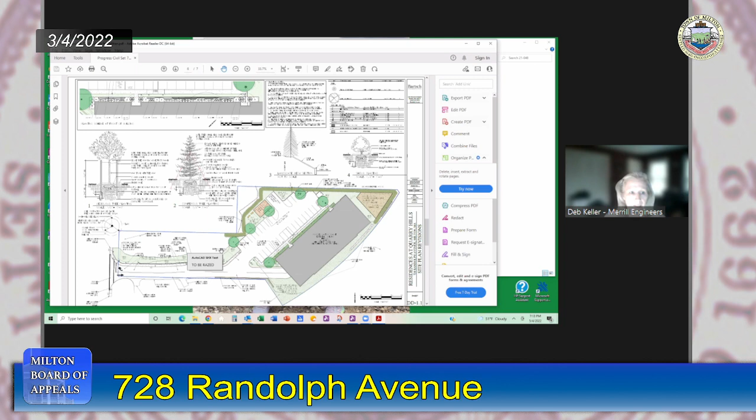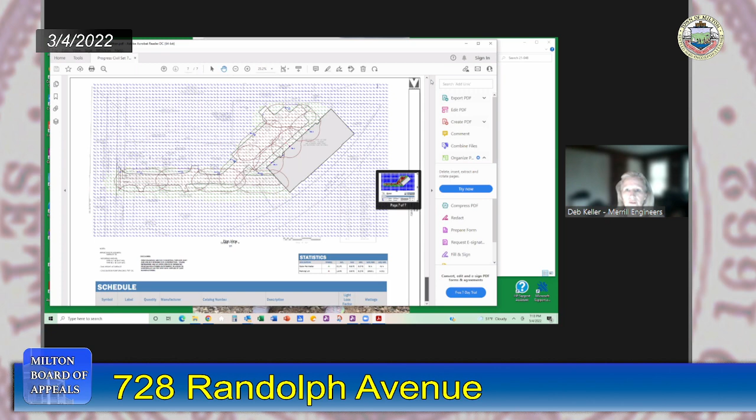As a progress set, we also did have lighting completed for the driveway itself and the parking lot and front of the building. That covers what we've done thus far from a site plan perspective.

I can either try to answer any questions at this point, or move on to the architecturals and the improvements that were done on the building. I don't have any questions yet. I don't know if Nick or Jeff have any questions.

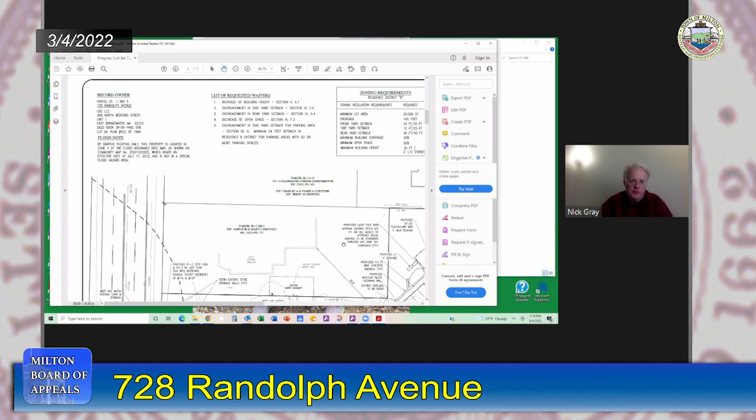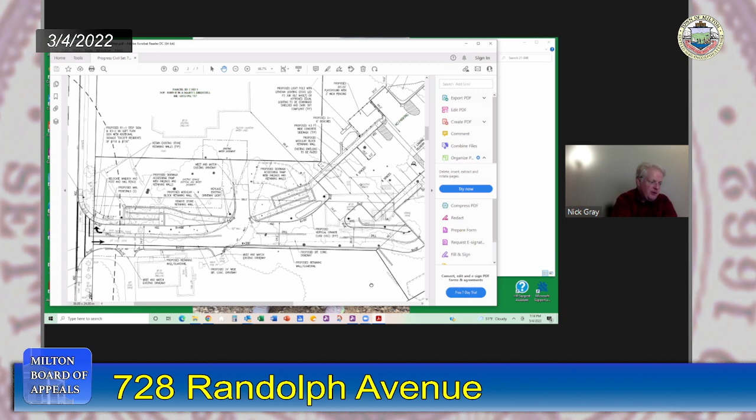No questions. If you could do me a favor, because the screen is so incredibly small to be able to see what you're pointing at. If you could refer, when you're talking to a sheet, give us the corresponding sheet number for the filing on this revised plan set, that would be really helpful so that I can look at it in a bigger, easier manner. Okay.

Mr. Chairman, if I may, just one quick thing. We'll let Andy go forward with the building plans, but I forgot to mention that we also have Jeff Bandini, and he sent in a supplemental memorandum related to the traffic concerns raised on the entrance onto Randolph Ave. That was sent to you folks and to Sean. So after Andy, with the board's permission, Jeff would like to report on that as well. Thanks. Okay.

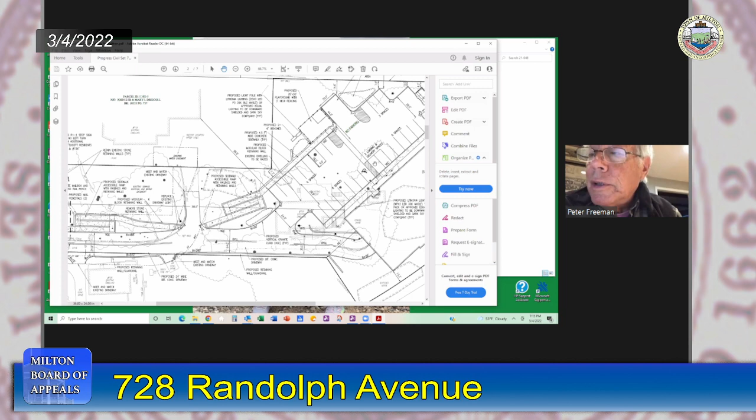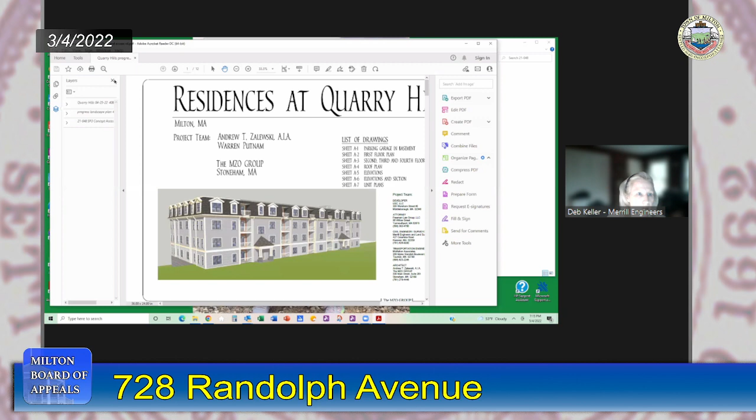Andy, do you want to go through them, Deb, or have Andy do them on the building plans themselves? I was assuming Andy was going to, but I'm not. Rob, is Andy here? He said he was going to be. I don't see him. Let me see, I do have the progress plans that I believe were sent. Again, they may be harder to see, not as big as possible.

So Deb, can you turn to sheet A-1? I can just walk through them. Sure, yeah, so she did the A-1. So Andy and I sat down and we addressed some of the comments, the architectural comments by Cliff.

So if you turn to sheet A-1, we included some amenities on the inside of the building. We included a community room on the ground floor. Andy addressed all the elevator comments, so they don't open up into the stairwell. We configured the floor plan slightly, and also included an exercise room with a gym to the right of that. And then some common storage for each of the units, so each unit would have their own individual common storage.

Did we add some internal bike racks too, Rob? Correct, we just, on the internal, deleted the bike racks on the exterior per the comments of the board. So that's pretty much it on the ground floor. Everything else pretty much stayed the same. We deleted a few parking spaces, obviously.

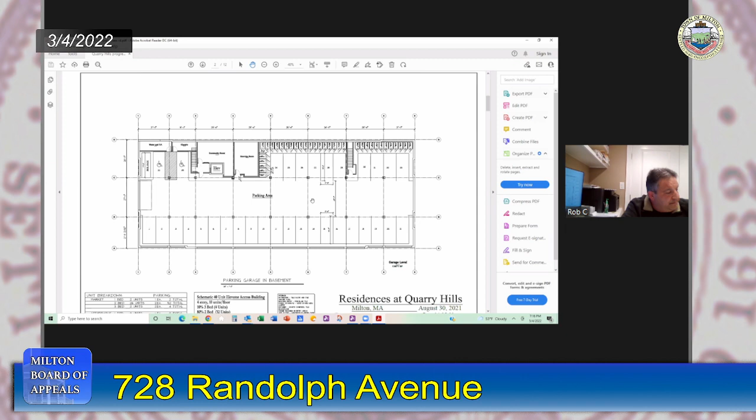Okay, you want to turn to sheet A-2, Deb? Yep. Also on the left side entrance there, we included a package room for all the packages for all the tenants.

And on each floor, if you look, Deb, towards the middle there, he hasn't labeled it yet, but we're going to have a community room where all the condominium owners will be able to gather if they want to do a Zoom or a podcast, then they could do that in that room. Each floor will have a community room as well. Is that this here, Rob? Yeah, we're going to incorporate both those - delete that wall there and have one just room because we don't need that closet.

Those are the basic changes for the interior of the building. I know Andy's working on some more detailing for the screening, the rooftop screening, and the garage screening for the open ventilation, but that's pretty much the gist of it.

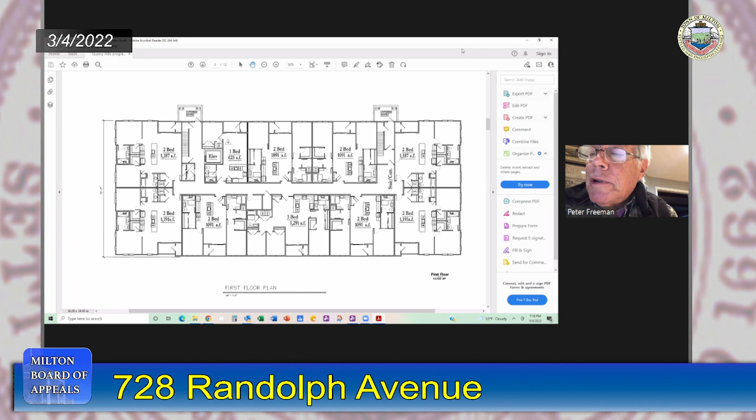Rob, can you or Deb show also on the site plan, which I didn't intend to rush over, but Deb, sheets probably need to be pulled up where some additional space has been added?

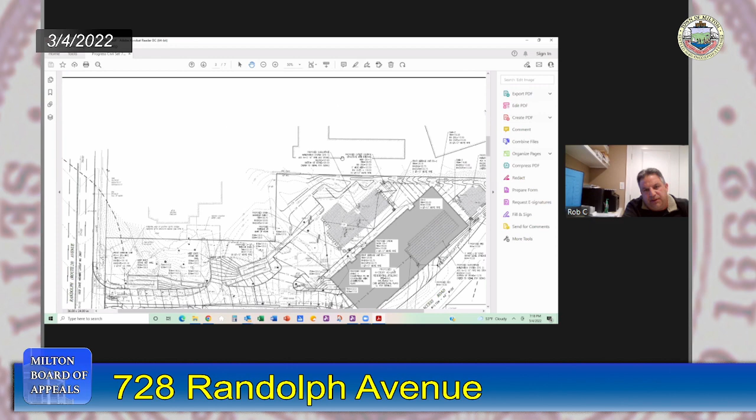You're talking about the amenity spaces? Yes. Yeah, so the best plan for that is the architecture, the landscape plan, Deb. If you want to pull that up, that'd probably illustrate it a little better. And it's colorful. Yeah.

So we engaged. That is sheet DD 1.1, that's a landscape plan. We engaged with a landscape architect.

The site plan was moving a lot. It doesn't incorporate the ADA ramps along the driveway. We're going to have some screening there to screen the ramps. But we included, obviously, the screening around the northern section that goes all the way around.

We have a fenced-in dog park area, which is a pretty big area for all the tenants to use. If you look at the top of the sheet, we have a planting schedule with all the plantings for the foundation plants and all the trees. That shows all the planting schedule.

We also included a playground with some swings and a sandbox, etc., for the residents, and some open space with benches and a grass area, and to the left, the emergency vehicle turnaround for the fire trucks. Those are pretty much the updates for the landscaping and the architectural.

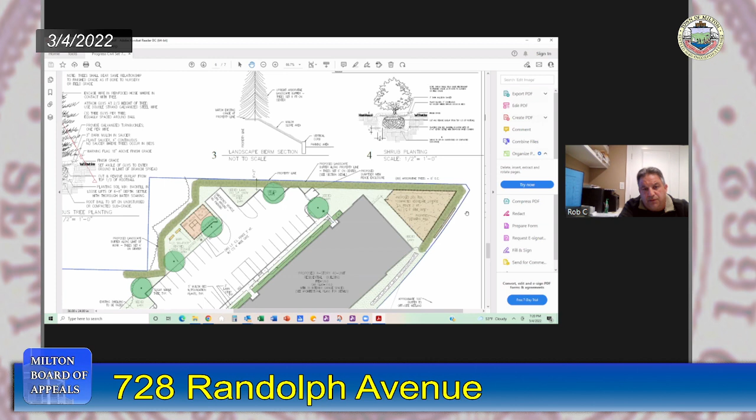Okay, thank you, Rob and Deb. If you have any questions through the chair, Mr. Chairman, that would be fine, or else we can turn to Jeff Bandini. Why don't we go ahead with Jeff? Okay, sounds good. Thank you. Thank you so much for having me.

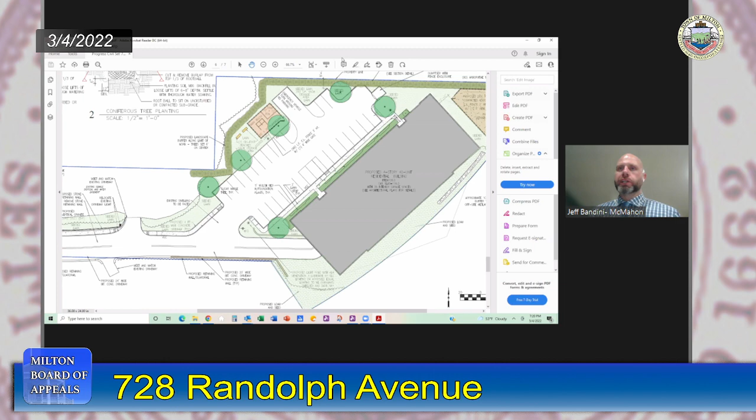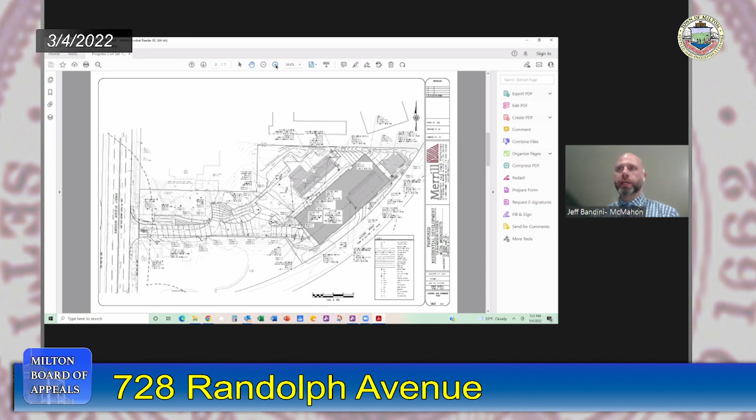So I'll take it from the top. In terms of the available sight distance, one comment from Mr. Reardon was to put together a graphic showing that the sight distance exiting the proposed site driveway, and for vehicles approaching from both northbound and southbound on Route 28, would meet the standards from the American Association of State Highway and Transportation Officials, which is the standard for roadway design in our industry.

So we put together an updated graphic showing a vehicle waiting at the stop bar, exiting the site driveway, looking left and looking right. Both of those distances exceed the AASHTO guidelines for stopping sight distance, looking both left and right. That's based on the 85th percentile speed, which we measured during the original traffic study back in October of 2021, found to be 48 miles per hour, the speed at which 85% of vehicles are traveling at or below.

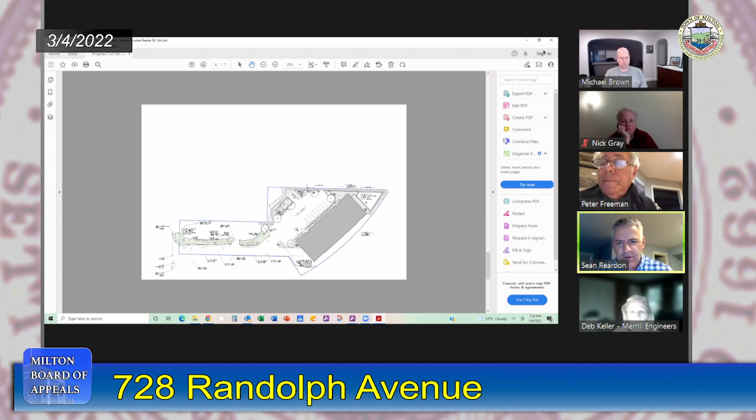Michael, do you want me to speak to that? Yeah, if you're able to, Sean, that'd be great. So as Peter mentioned, this is Sean Reardon, Tetra Tech technical review consultant for the board. We had a really good meeting with the design team and the applicant and fleshed through some of these things. At that meeting, the concept of the access road came up, and I don't know if one of those 68 comments was actually my request for them to do so. They had a concept plan that was pretty intriguing and showed that it was really worth considering. So what we had done was put the review of new material on the back burner a little bit, just to give that time to percolate, and maybe something came of that. That being said, Deb definitely has addressed many of our questions, but like you said, we had a lot of questions, and I imagine there are still some outliers there.

One big concern I have is it looks like the revised plans are proposing an infiltration system underneath the garage. That's specifically a solution that we didn't allow on Blue Hill Avenue, because stormwater standards say it can't be under a foundation, or it has to be 10 feet away from a foundation. So we'd have to certainly look further at that. But you can see a lot of the challenges were solved by very robust moves, and the question is whether they actually work given the site constraints. So the first thing we'd have to do is look at all the revised grading and see if the things shown on the plan logistically fit in the space that's out there, given how tight it is at the perimeter. So the short answer to your question is yes, they've addressed many of our concerns. We haven't confirmed that they're satisfactorily addressed, and I'm sure there are some other issues that will come to the surface.

Before I move on, I did have one question for Jeff. Deb, if you could show that entry. Okay sure, again. So I'm a little confused by his statement about the lack of any required tree clearing in the right of way. Jeff, if you could explain how the trees on the plan, both sheet north and sheet south, don't impact sight lines as you look left and right from the entry, I'd appreciate that.

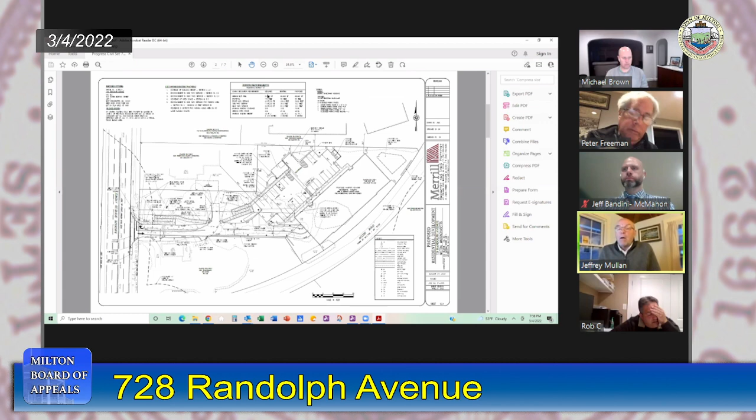So thank you for that. I have two or three questions for the applicant. The first is on the switchback for the accessible path. I think it'd be helpful to see what that looks like, what materials it's made out of, how high it is, maybe a sample. I mean, it looks like two pretty extensive structures. So what is that like?

Is that the type of thing you'd see coming off of the Mass Ave Bridge down to the Esplanade, for example? Is that the kind of size, or is it much shallower? So, this is Deb Keller from Merrill. You're correct, they are relatively extensive structures. There would be a retaining wall on the upgradient side as you come - this is a high side. You switch back down to low grade here. So you'd have a retaining wall wrapped around a concrete surface with railings.

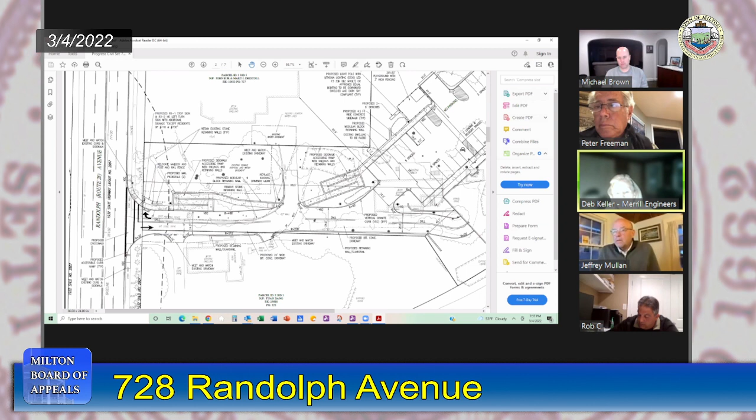What's it made out of? Well, it would be concrete. The whole thing is concrete? Well, you'd have a concrete retaining wall with a concrete slab, so you could fill underneath it. It would be almost like a foundation structure.

But how high is it? So the existing grade here is about 130, 131. Your walkway here is at elevation 125, matching the parking lot. So you have about a 5-foot retaining wall on this side, and as it would drop off on this side, so you come around, you'd be close to being at grade at 122 right here. Then you're sloping down, coming back to 120. You're at 124, so still a 4-foot retaining wall on this side, coming back down to where you're meeting grade, where you don't have retaining walls.

Walking across the driveway here, you have a couple-foot retaining wall along this walkway through here. So it's 4.5 feet here, about a 4-foot wall as you come in. We're matching existing grade here. You'd have to have a railing around this turnaround, switch back down, matching existing grade here. So you're actually at grade or a foot lower than the driveway at this corner, and then you come down and meet grade here as you come into the intersection. So they would have to be detailed - I tried to provide elevations on the grading plan, but moving forward for construction, they'd have to be further detailed.

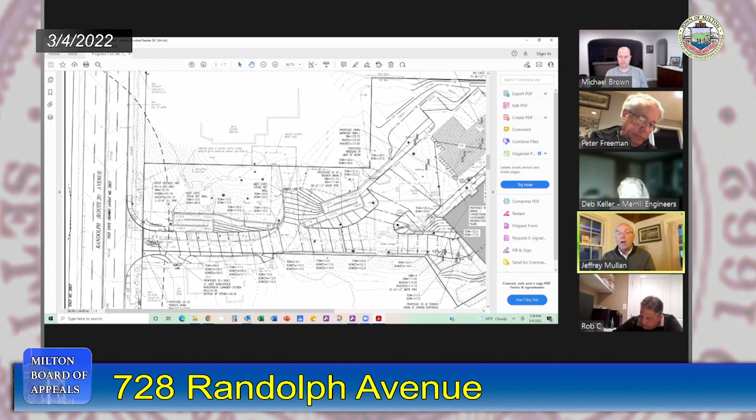Yeah, it'd be helpful - at this point you need to do your engineering, but it would help to visualize that. I suppose it's less complicated than I thought, because I thought the whole thing was elevated. So just because of the various changes in elevation, it's a little unusual. I think it would help to say this will look like this other thing we're familiar with, or to have a picture of it. I'm trying to visualize that in my head, and I'm having trouble doing it.

If I can, so it's just a standard handicap ramp. If you go, for example, to the Milton post office, the ramp that you wind around to get to the front door, that'd be a visual for you.

And that's in both locations? Yes. Any ADA or handicap accessible building, if it's elevated above sidewalk grade, you need to have a ramp. So you'd do the typical concrete slab with your railing system, ADA compliant, with certain requirements of the railing system.

The difference though is that there's a retaining wall, so the whole thing is sunk into the ground. Right, on the high side. Every handicap ramp has that retaining wall because you're elevating from one lower elevation to a higher one. So what you do is bury the retaining wall so you don't see it, but that's what Deb's alluding to - the retaining wall that gets buried, and some of it gets shown as you come up.

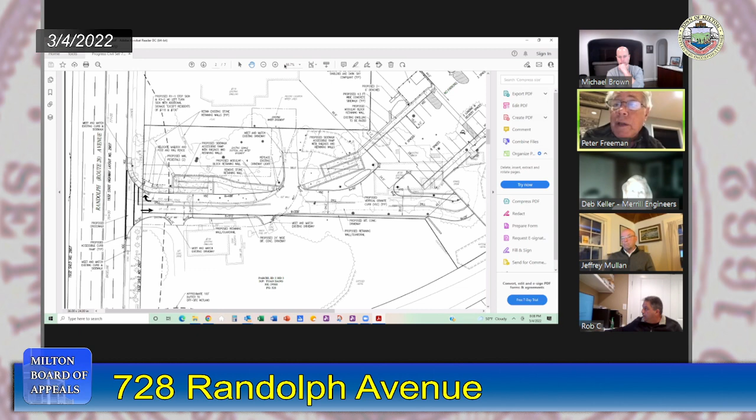And as you both said, leave the legal situation to the courts if necessary, if the owners of 718 and 736 don't come to agreement with my client. So again, I do understand those questions. If it's helpful to you, for Deb to just walk through the existing curb that is on the right of way on 736, the 12-foot portion, and what's being proposed now.

No, I can read the plan. I'm satisfied. Okay, thank you.

I think we're going to have to disagree. I don't think we can take chances with access to and from Randolph Avenue. So we'll have further discussions, but enough said about my concerns.

Yeah, well again, it's helpful to have gone over it because I respect the questions, and it certainly is an unusual situation. So I hope nobody gets upset about anything, because we're trying to, in good faith, figure it out. But again, I appreciate the concerns and I do understand it, and we'll do what we can to try to address things from both a legal viewpoint and the practical safety viewpoint.

Yeah, let me just confirm, you are still proposing that some people will be able to take a left and others will not be. Is that correct? Well, currently it is, but I don't mind saying, without having consulted with my client, I think actually, Rob, we did speak about it. So Jeff and Rob, correct me if I'm wrong, but that was our initial proposal.

But given the analysis, especially the additional analysis that Jeff just went through this morning, I'm not sure why there's really the need to do that. Now, that's me as a non-engineer speaking, but based on what I've heard, and I'm putting my own client or consultant on the spot. If you'd rather think about it and talk about it at the next hearing, that's fine. But that thought has crossed my mind, given this analysis from the traffic perspective.

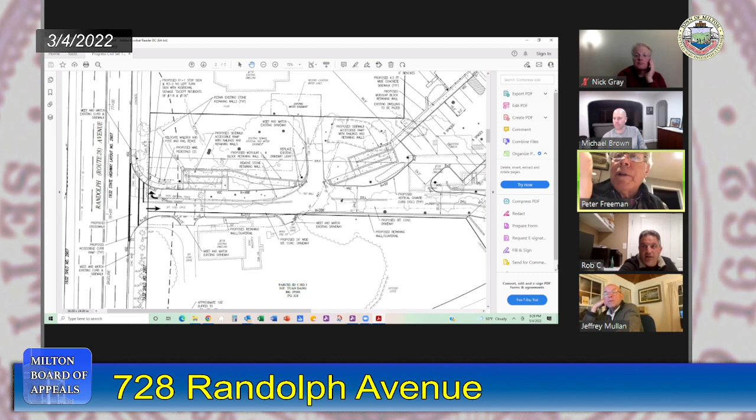Mr. Chairman, I'm back. I can't see folks because of the screen sharing, but we're back, so when you'd like me to speak, I'm ready. Hi Peter, thank you, there you are. Thank you very much for allowing us to talk. So again, as we said, we do want to work with you.

So we will grant right now a 30-day extension to that period to end the hearing. I do want to say we'll certainly do every effort, and Deb Keller has been very good. I think she will be able to turn around the plan soon enough to have a good review and time for review by Sean Reardon prior to the June hearing. Certainly when I was talking about perhaps needing more time, it wasn't any reflection on Deb, and likewise with Sean. He's been superb in reviewing things and getting things done, always of great assistance. So if that's okay with you folks, we think it would be a waste to do anything on May 25th. But then the next date, if you don't mind repeating the dates after that, because I didn't write them down quickly enough.

The next date after that scheduled is June 15th. But it sounds like we have some flexibility if we wanted to adjust the dates, that might be something we can do. But if you're telling me June 15th is a date you think is good - I'll let Deb chime in. I'm thinking of at least a week, Deb, and also Sean to chime in, but for Sean Reardon to review, if you're flexible on June 15th we probably could meet a bit earlier in June. Deb, to put you on the spot, what do you think?